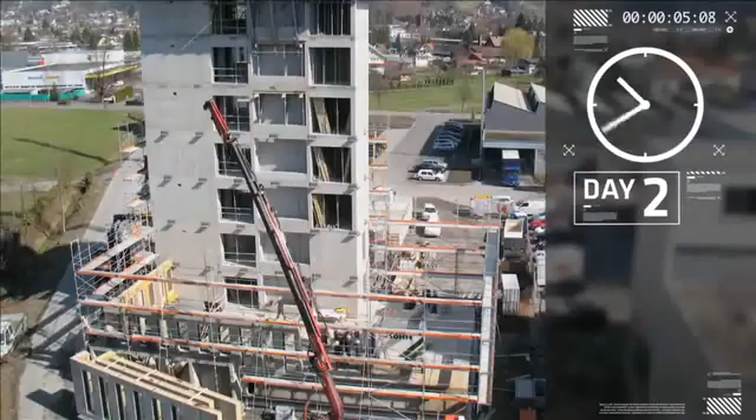So this is a time-lapse video of how LCT-1 was erected. It's an 8-story office building. While the foundation and the central core were being built on-site, the walls and the floor plan panels were produced off-site. Once completed, the prefabricated elements were delivered to site and the building enclosure was assembled.

First, the facade elements for each floor were installed. Once all the walls were up, the floor slabs then are placed on top of them, floor by floor. It took 8 days to install 8 floors, and all the work was done by 5 carpenters.

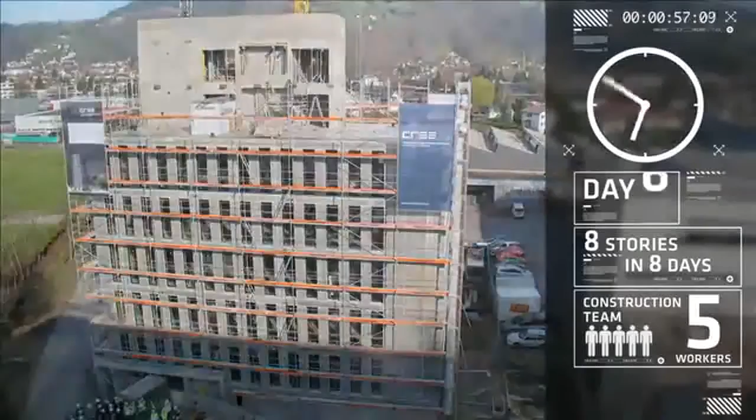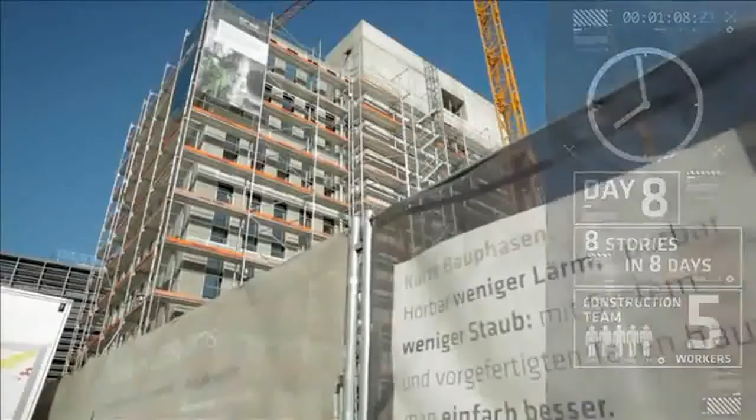The facade elements are delivered as completed wall panels, which include the framing members, insulation, windows, sheathing, vapor barrier. And the floor elements are hybrid slab. These are wood concrete slabs, and they were also prefabricated into one element in the shop. Here's a close-up of one of the floor elements and then the wall elements.

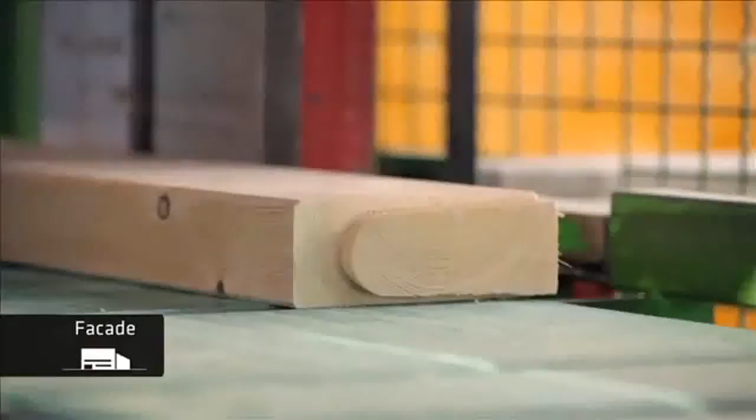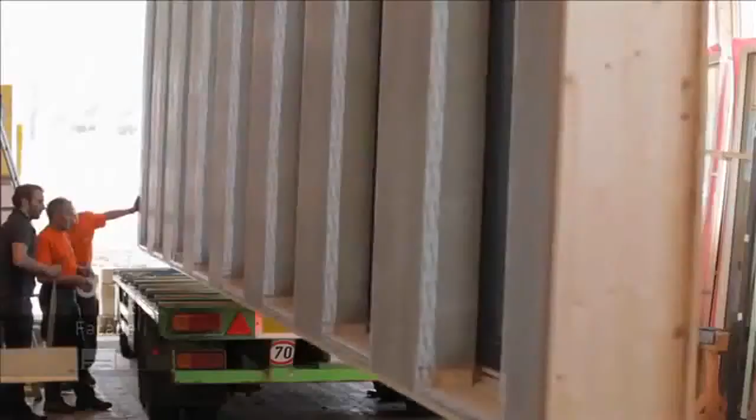Now you're going to see the carpentry shop where the facade elements were produced. They're produced flat on tables. Once the frame is completed, the panels are stood up to install the windows. All the joints are taped airtight to optimize the energy efficiency. The panels are then stored and when ready, loaded onto trucks and delivered to the site.

Here are the floor slabs. They're made up of 4 wood beams, 2 at the end and 2 in the middle, with concrete poured around them to create a diaphragm. You can see there's 4 holes in each corner of the slab, and these are needed for the assembly, which I'll describe later.

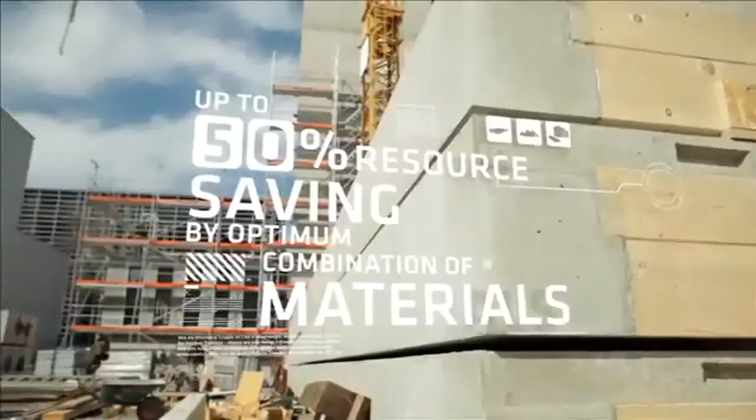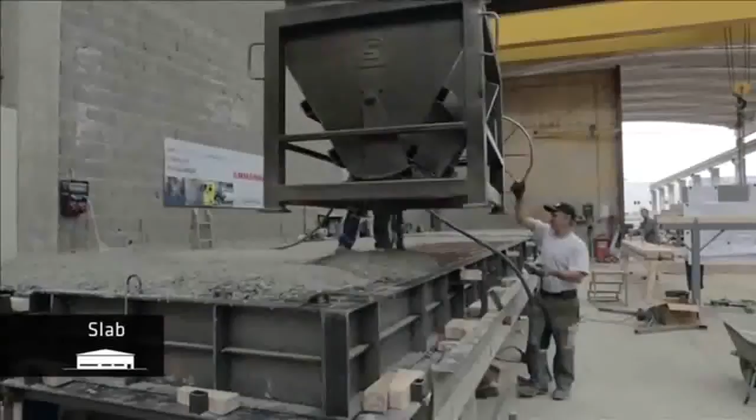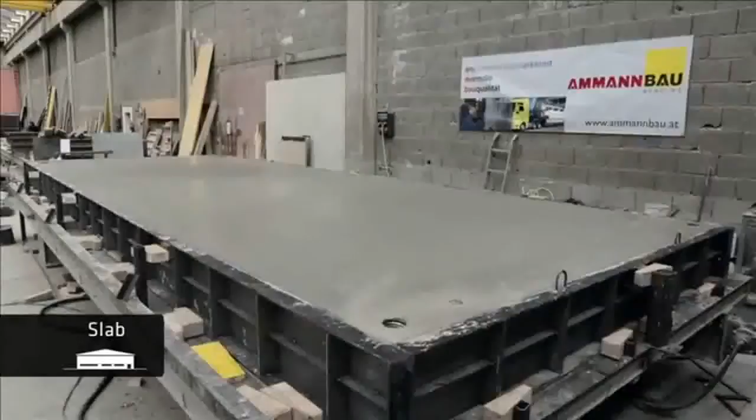Next, we're going to look at the precast concrete facility where the slabs were produced. The wood beams were ordered from a lumber company who cut everything exactly to precision using CNC machinery. The beams were then delivered to the precast facility where they're laid in metal formwork. The reinforcement is then installed and concrete poured. The next day, the form can be opened up and the next slab produced.

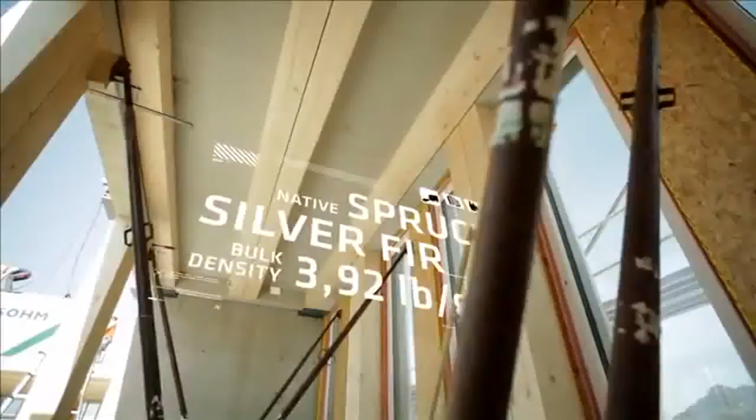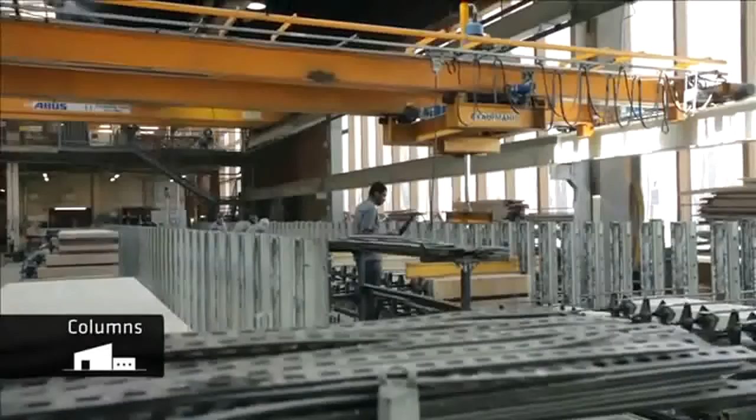All the wood used is engineered lumber. It's all finger jointed and laminated. This wood is stable, it won't shrink and it won't twist, and can be cut precisely. Engineered lumber uses smaller wood sections to create larger elements. This is a method to manage the forest, allowing healthy trees to grow while removing older or damaged trees that no longer absorb and sequester carbon.

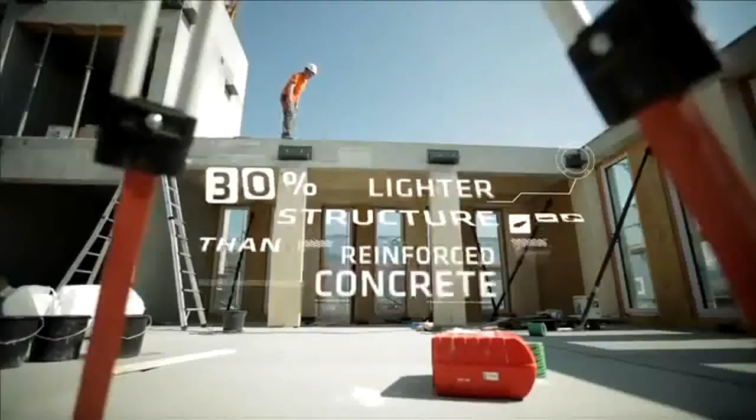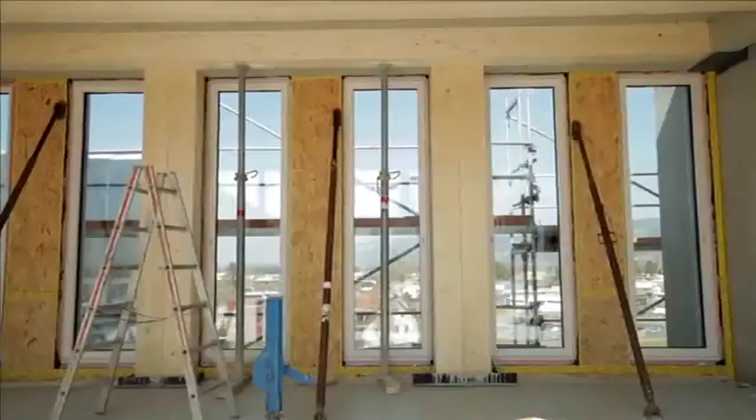The system of design and construction allows for lighter buildings using wood as a renewable resource. They're made into panels that can be assembled quickly without disturbing the neighborhood. Each story is assembled watertight and airtight, while emphasizing the beauty and warmth of the wood, which is a natural material. This is much different type of office building than we're used to.

For LCT-1, a recycled aluminum rain screen was installed on site. LCT-1 was designed and built to a very stringent energy standard called the Passive House Standard. Using the LCT system, each building has an individual design and can look completely different, but all are resource and energy efficient.

To explain all of that, I think the best way is to first introduce myself and how I was introduced to this whole system. I'm an architect in Berkeley, California. I went to UC Berkeley and was licensed here. My wife is Austrian, and in the early 90s we decided to move to Austria so she could be with her family.

And our daughter could get to know her mother's home. I ended up becoming a developer rather than an architect, and I found this old barn that we turned into 15 condominiums. This was my introduction to timber construction and energy efficient design, which is very standard in Austria. You can see the building on the bottom left.

I did the design by hand. The carpentry company took my drawings, put them into a computer, and delivered the parts exactly as specified. All the wood was pre-cut and pre-drilled, and many panels were already assembled together. At the time in the 90s, this was a standard called open wall standard, where the wall itself was not insulated and the windows were not in — a low energy standard. You can see the completed building on the bottom right-hand corner.

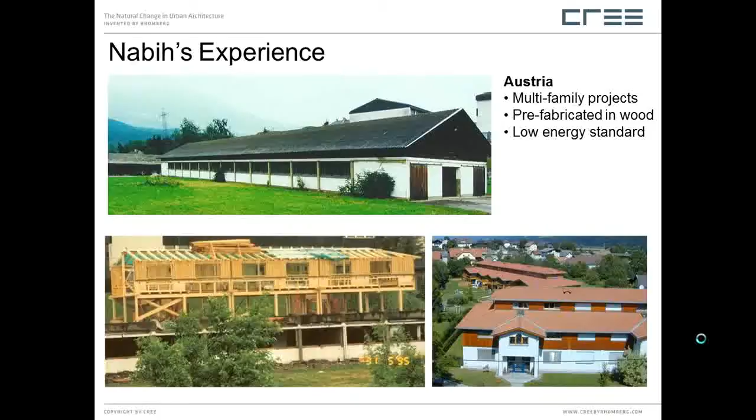We kept improving the system with that same company, and at some point in the late 90s we began to sell houses to Ireland, where their system had advanced further. The same carpentry company was now making closed wall panels with the walls already insulated and windows installed. They made the houses in Austria, put them on trucks, flew the carpenters to Ireland, and assembled the houses there in a week at a time.

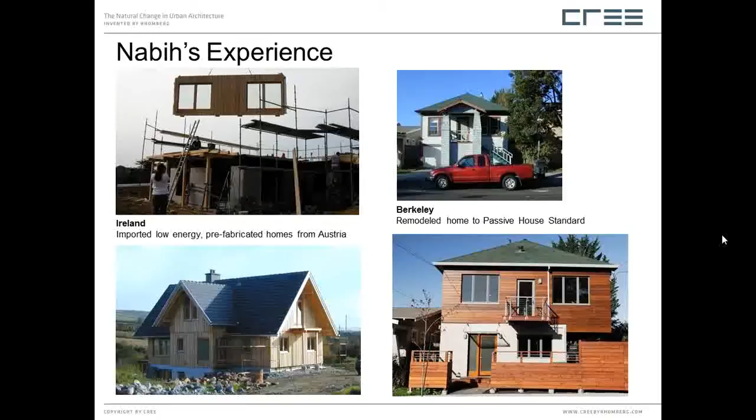Through this project, I began to work with the Austrian Trade Commission to help Austrian companies come to the U.S. and promote their energy efficient systems, products, and construction methods. That's how I began to work with Cree and help them promote the LCT system.

So the Life Cycle Tower system was developed by Rhomberg Bau, a large general contracting firm on the west side of Austria. It's a fourth generation company with a lot of know-how and many people with extensive construction experience. The current CEO, Hubert Rhomberg, wanted to do a better job of construction and make all his buildings much more sustainable.

He knew we were using too many resources from the earth, and he looked at ways to make buildings not only more resource efficient but also more energy efficient. They looked at trends in how we live and how our cities and countries are growing, and there's definitely a trend toward urban areas — denser cities, closer to rapid transit systems, so people don't have to drive everywhere and have everything accessible.

So one of the ideas was how to come up with a new system for urban areas made more out of wood — a natural, renewable resource — rather than always relying on concrete and steel and products coming from fossil fuels.

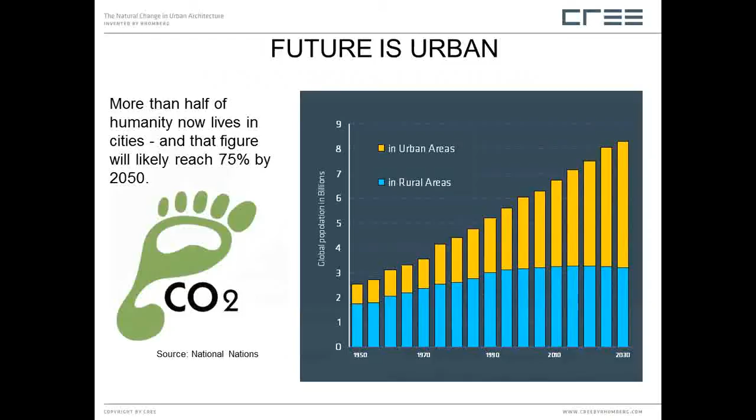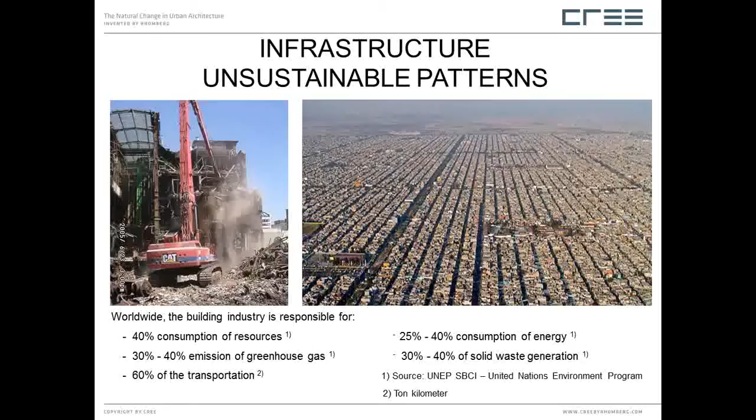Also, when you look at the infrastructure and the buildings we have and their performance, it's well known that the building industry is responsible for a lot of resource consumption, emissions, greenhouse gas emissions, and energy use. So overall, the building industry isn't performing very well right now, and it's responsible for a lot of our climate issues. Also, the process of building is very chaotic.

It's still very manual — it hasn't improved. The process of making buildings is nothing like how we make cars or computers. We still go over schedule, it's still expensive, and on top of that, the buildings themselves are not performing very well.

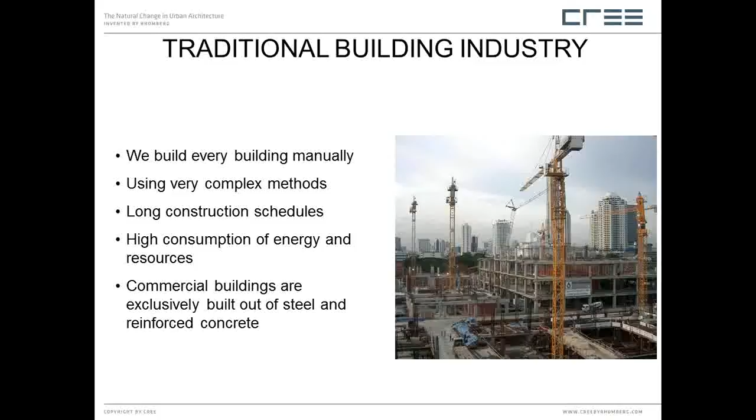So Rhomberg Bau decided they're going to start a research project to come up with a solution to resolve a lot of these issues. And this is how the Life Cycle Tower process and concept was invented.

Rhomberg Bau put a team together to come up with a solution, and part of the team was Arup, a worldwide engineering firm with offices in Berlin, specialists in timber. They've also worked with Hermann Kaufmann, an architect from the same province of Austria as Rhomberg Bau, who is a specialist in timber construction. He grew up in the Alps, and everybody in his family is involved with timber and wood, so he's got a lot of know-how.

Another member of the team was Wiehag, a lumber manufacturer. Together they put their heads together and came up with a system where you can go up to 30 stories, up to 100 meters, for a tall high-rise wood building. It's all prefabricated using a modern industrial process, and it can meet the passive house standard, and if the client wants, it can even be a plus energy building that produces more energy than it needs.

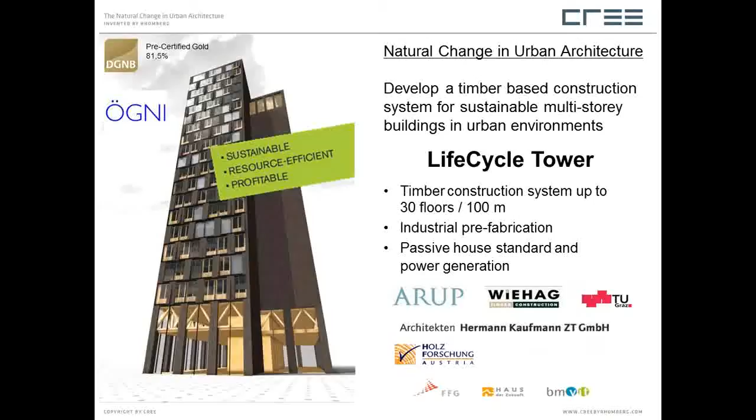To do that, what was developed for the Life Cycle Tower was a building system. We like to talk about it like my computer—it says Intel Inside. This is the little chip that operates the computer, and every manufacturer that has a computer uses that chip, then designs the computer the way they want: different color, size, speed, performance. The idea was, how can we do that with a building, for the building industry, with a new wood system?

The main part of our building system is that with tall buildings, you always have a core in the middle. This is the stiffening part of the building—like the flagpole versus the flag itself. It's very stiff and takes all the forces. In that core you usually have the elevators, the stairs, the shafts, the bathrooms.

Then on the exterior of the building we have glulam posts—you can see them here on the outside. They're carrying all the gravity loads, all the load going down to the ground.

And then we developed a hybrid slab system that you saw on the video—a slab of wood and concrete. The slab spans from the exterior walls, sitting on two posts, and spans to the center of the building to the core. This is where all the forces are transferred to the slab, and from the slab to the core and down to the ground. So that's kind of the core inside of our system.

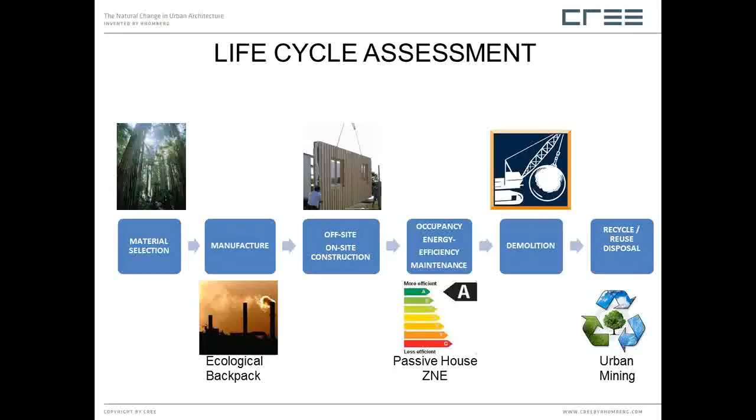And then at the end of the life of every building, what do you do with it? Do you just demolish it, dig a hole in the ground, throw everything into the hole, and start all over again at point one with new materials? Or can you design buildings in a way that at the end of their life you can actually recycle the materials and reuse them?

So that was the idea behind everything we were thinking. And some of these things are sometimes not so simple to look at or understand.

One of the things we talk about in Austria is the ecological backpack - looking at some of the products we have, and when you see how much they really weigh, like a pair of jeans or a cell phone, and then add the weight of all the materials needed to actually make that product, it turns out the weight is much more, with a much higher ecological backpack than we'd think. A cell phone weighs 0.3 kilograms, but in reality it's carrying 500 kilos.

The other thing we always talk about is urban mining. We don't always have to mine the earth - we have already mined it once. A lot of the products that came out of it are already in our buildings, so why can't we just find a way to reuse a lot of these buildings for other things?

And that's basically the beauty of wood, and why wood is such a great product. When you look at the forestry carbon cycle of wood, it's very sustainable - it's carbon neutral. On one side you have things that emit carbon into the air, like factories and cars, but also trees. Young trees absorb carbon, give us oxygen, and grow fast - they're really working for us.

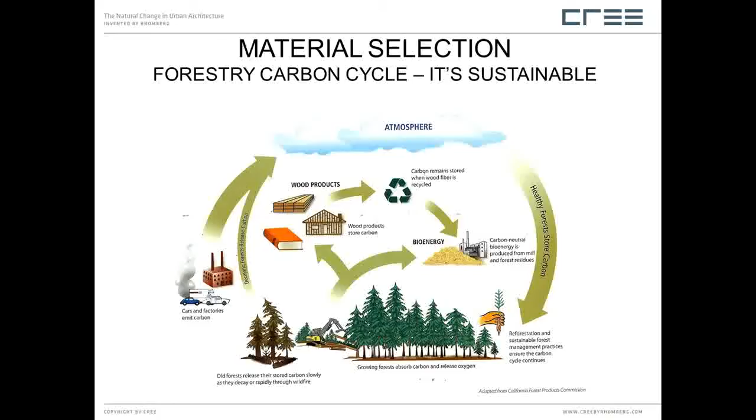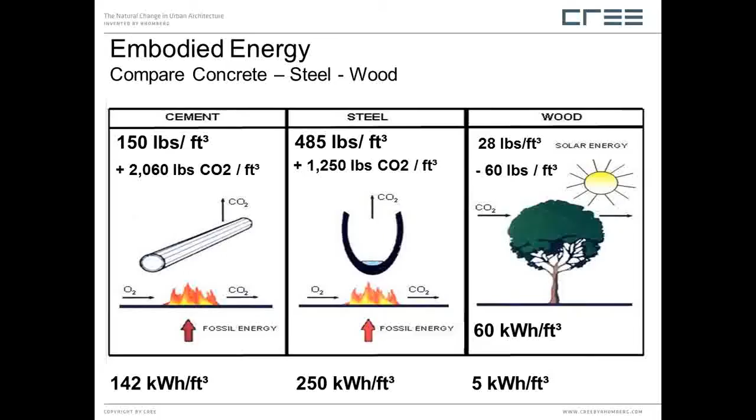Steel weighs more, 485 pounds per cubic foot. It needs more energy, 250 kilowatt hours per cubic foot to produce, but it's a little better with CO2 emissions, about 1,250 pounds. Wood is much lighter, 28 pounds per cubic foot, and only needs 5 kilowatt hours per cubic foot to produce. At the end of its life, you can heat with it and create energy, which makes wood pretty much carbon neutral, and it's all from solar energy from the sun.

Here are some examples of modern wood products coming on the market. Some you're already familiar with, like glue laminated timber, made out of smaller pieces of wood to create larger pieces, and finger jointing of wood members to make them longer.

This new product coming on the market is called cross-laminated timber. These are large slabs of solid mass timber that come in 3, 5, 7, or 9 layers, in panels of about 30 to 40 feet long, 8 to 10 feet high, and anywhere from 4 to 11 or 12 inches thick.

Different manufacturers have different systems for making them. This material is becoming popular because a lot of our forests, especially on the west side of the U.S., have mountain pine beetle infestation. Research shows this is a good solution to take this wood out of the forest before it all burns, and turn it into a building product.

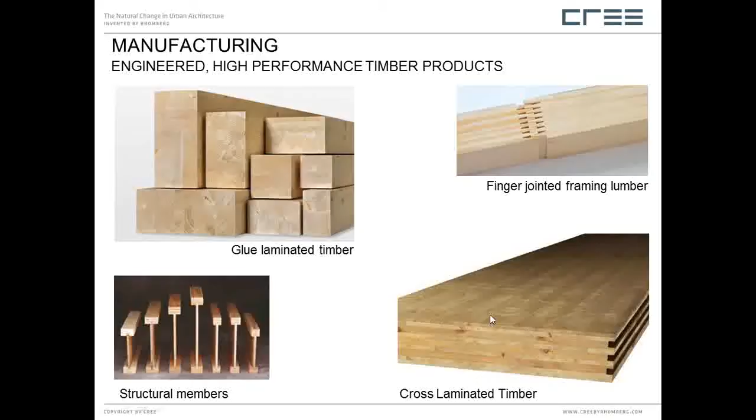With these modern wood materials, we have a modern way of working with them, starting with a CAD program that the architect or engineer draws in. That data can then be sent to a machine, which cuts the wood to very high precision, exactly like the drawing shows.

Then this process of industrial manufacturing that we already use to make cars, computers, furniture, and refrigerators - we can use the same type of system, making panels together on tables. Some of the bigger companies have ways to flip the walls over so you can work on the back side, then stand them up and add the windows, the siding, and so on.

Different companies in Central Europe have different ways of doing it, but a lot of it involves much more prefabrication than we do here in North America, and they're also able to make closed, finished components. This is an example of bringing an entire wall and placing it, including insulation, windows, floor elements, roof elements, and it's even easier to have the mechanical system prefabricated off-site and brought on-site.

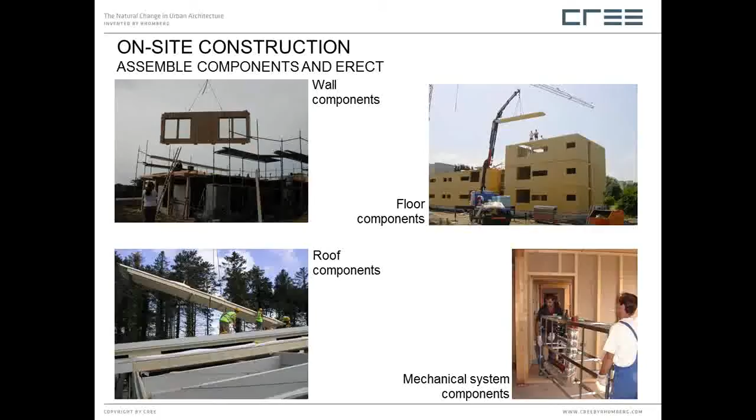After Cree, this was the motivation and the idea, based on what was going on in their country in terms of the wood industry, carpentry, advanced carpentry products, and systems of work. They decided they wanted to come up with a product they could put on the market.

When you analyze how we build and deliver buildings, we have the original system - the traditional system they call design, bid, build. You have an owner, then an architect, then the builders and estimators, up and down the chain. That system has proven it doesn't really work. As I said at the beginning, the buildings are not performing - they use a lot of energy and resources, have a lot of defects, price overruns, and scheduling overruns. So we're trying to look for a better system.

This better system now is called the integrated design process, where if a client is informed and wants a better building, he puts the whole design team together at the beginning. He understands he has to pay a little more money up front, but at the end he's going to save a lot of money.

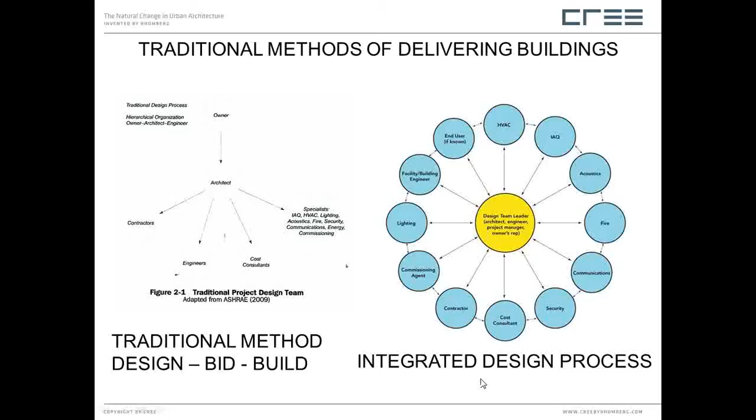That whole design team kind of works together to design the building. But when we looked at that building, it's also a prototype. All of our buildings are one of a kind. So Cree wanted to come up with a system where we can integrate a lot of this design process in-house, something people may or may not see in a building, but we don't have to create it every single time, that we have a system that can be used but make every building different, different heights, different lengths, different appearances, but they know that they will perform because the backbone of the system is already proven.

So in our case, for these tall wood buildings like the life cycle tower, we have a core. This is the stiffening part of the building. That core, from the research that we've done, we feel confident from an engineering, seismic, and fire point of view that it can be made out of wood. It might be a little bit too early to have building departments accept that, so it could also be made out of concrete or steel.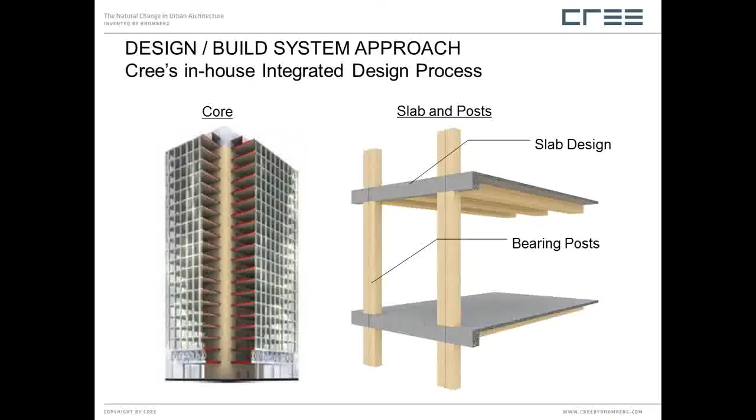On the outside of the building, then we have the glulam posts. These are the bearing posts. They're bearing all the loads up and down. And then attached to that are our slab system, our hybrid slab system. This is where we've spent most of our time and money to research and come up with a solution for these slabs.

Additionally, what we can add to the building is our facades. The facade in our life cycle tower office building is what we call a curtain wall. It's not load bearing, it's not carrying any of the loads, it's just attached to the post, so it's just hanging on the outside, kind of a jacket on the whole building. On that facade, you can add different elements, from solar elements, shading elements, the windows, the insulation, green walls, anything that the client and his design team would like to have.

And for the interior of the building, also with our technical team, we can help with the design team and optimize all the systems so that they all work together, from the facade itself to the heating and cooling and ventilation and lighting and so on.

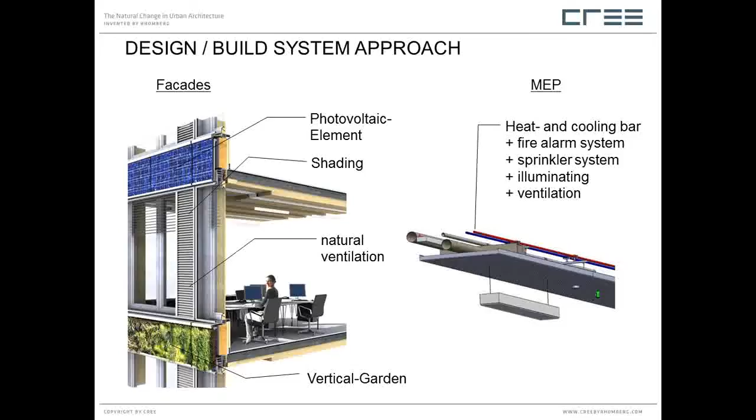So to start, we built a small little building as a prototype to see what it was like, and we assembled it and also disassembled it to see how it could work.

While at the same time, we ran a series of fire tests, because that's one of the most important things. When you use wood, there's still some fear that wood burns. But what we found is wood does burn, but it burns very predictably. We already know this, it's actually in the codes, and it basically says for every 1 hour of fire protection you need on a piece of wood, you need to add 1.5 inches of wood, because that's how long it takes for 1 hour of wood to burn when you have heavy timber, big pieces of wood.

We make the wood bigger by adding 1.5 inches of wood on every surface that would be exposed to the fire. And you can see, after a series of tests to optimize the system and have the wood and the concrete work together, we were able to pass a 2-hour fire test.

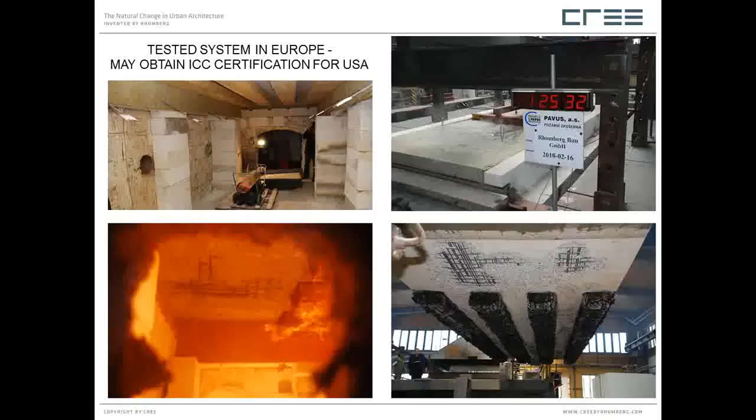The idea of a hybrid system of wood and concrete is that every material has its own properties. They don't all perform the same. They're good at some things and bad at others. So to be able to make these slabs as light as possible, use the least amount of material possible, it was best to combine the best properties of both the concrete and the wood to make these floor systems that can span 30 feet and carry all the loads that need to carry, and at the same time withstand the fire requirements that are required. That's why we came up with a hybrid system.

After all of that, we decided that we needed to put up a building to show what we've done, and this is the story of LCT-1, this office building we put up in Austria. It was a project developed by Rhomberg Bau itself on one of their properties. The architect on this project was Hermann Kaufmann, who helped us originally with the research of the project.

And then we added the offices around it, only on one quadrant, just to save some money, but a developer would have actually been able to go four times around this core. That's how stiff it is. But this, we just wanted to show what we can do.

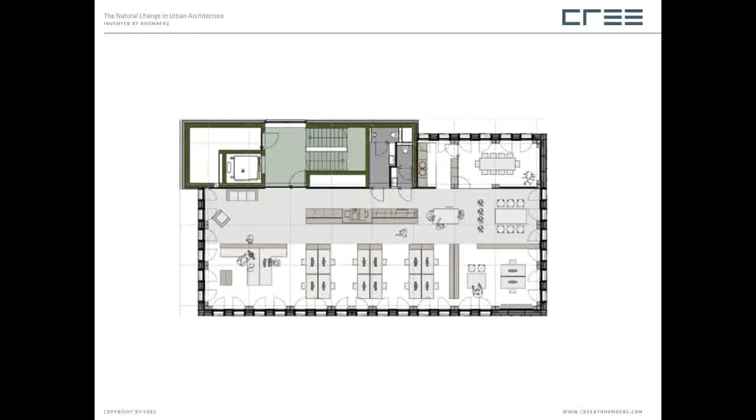So we have the offices here attached to the core, and here is an example of where, in terms of design, we can extend away from the core and still add to the building, not always having to support things only on the core. Those are part of the design of the system. You can see one area of the entry is two stories, just the entrance, but altogether it's eight stories.

So this is a little more detail on how we actually built the building together. Here is the central core of the building. The building department required us to build that out of concrete, so we did. The foundation and concrete were built on site, and off site we were actually making the wall facade elements and the floor elements. This building was built in Austria according to the Austrian seismic requirements.

And so we've actually adapted this to the US, which I will show you closer to the end of the presentation.

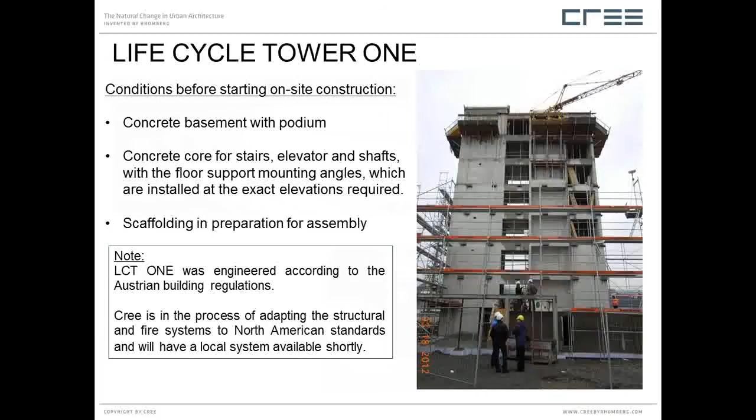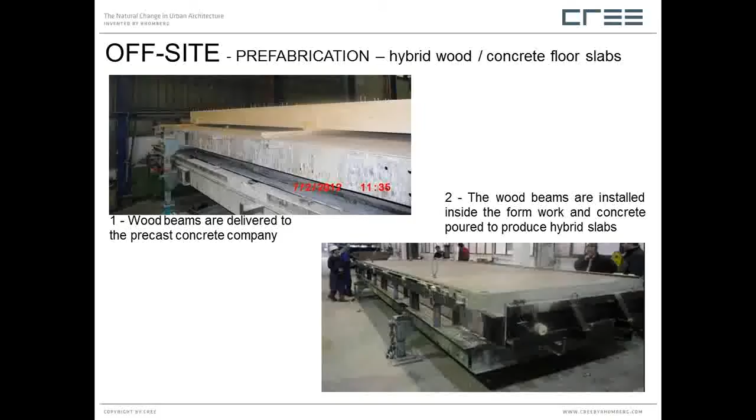Here's the slabs being made off-site. So we bring the wood to this precast concrete company. We have the metal formwork that opens and closes. We put the wood in, we put the rebar, we pour the concrete, and then the next day we can open the slabs and store them.

At the same time, we were making the carpentry, the wall systems being made in a carpentry shop. Here you can see they're all heavy-duty glulam posts. And the way the system works, at the top of every post there's a metal tube, and at the bottom of every post there's a plate.

The ground floor posts have just a flat plate with holes that you can bolt onto the foundation. But once you get up higher, these plates have pins in them. Basically these tubes on the top have a little hole in them, and this pin goes into the hole. That's how we're able to assemble things really fast.

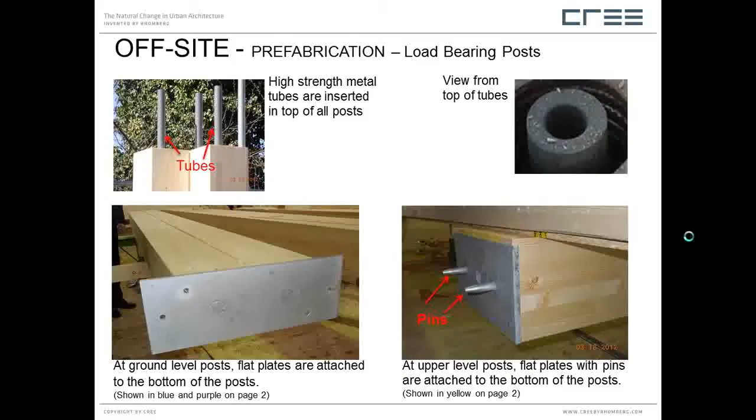This is a thicker wall, thicker than we would build in California, but in Austria it's a cold climate, so to meet the high energy demands or to reduce consumption, you need more insulation.

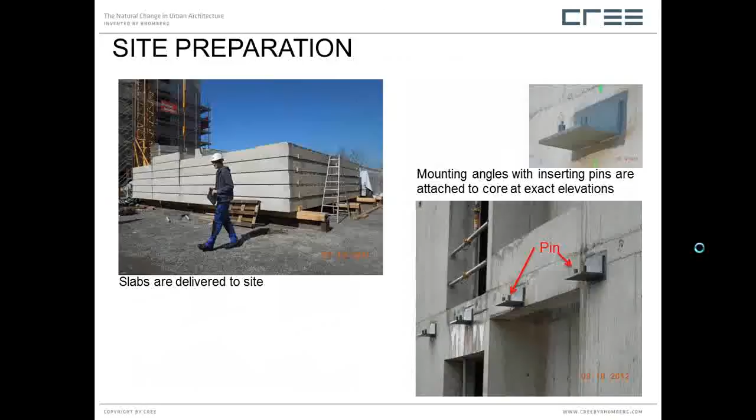Once we start on the site, all the slabs are there, the core is ready, and there are metal angles with pins poured into the concrete to take the slabs. Then we start construction. The first step is to bolt all the ground floor posts into the concrete at the foundation, and then we start bringing the walls. This is floor number 1.

You can see the wall elements come in, windows are on, everything is on. Here are the posts with the tubes on top of them.

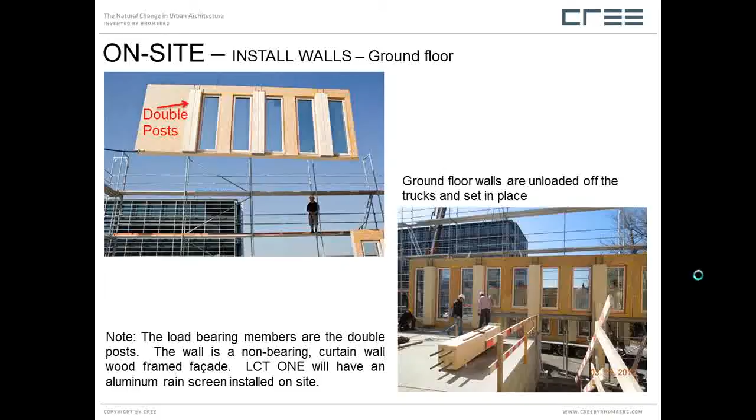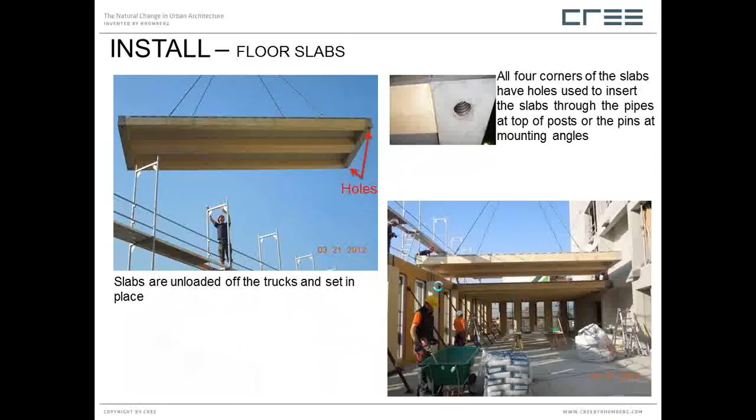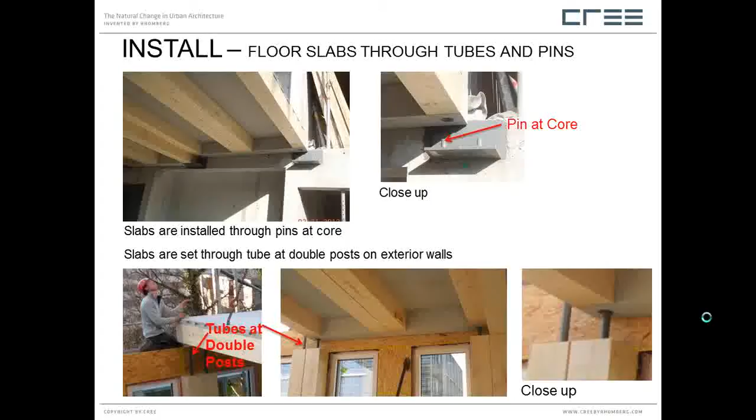After all the walls for floor 1 are put in, we start bringing in the slabs for the floor. Each slab has a hole in the corner, already taken care of when we made the slabs in the formwork. We can just drop a slab into place, and at the wall we have the angles there with the pins. It sits right through the hole, and this doesn't need to go floor to floor, it's just attached to the wall. But on the exterior, they need to be connected together, so we have a much longer tube at the exterior wall, and the slab just slides into it and finds its place really quickly.

Once all the floors are put together on one level, if you go up on top, you'll see these tubes sticking up above the slab, about half an inch or so. Then we start bringing in the walls of the next floor, and the walls have pins at the bottom—that pin goes into that hole there. That's why everything kind of fits together really well.

In terms of connection, we have a metal plate sitting on a metal tube—that's where everything is bearing metal to metal. But we have wood from floor to floor, kind of separated also for fire reasons, with concrete in the middle, but everything is actually bearing on metal.

This is the floor below, you can see the different slabs. The next floor is going up. Everything as it goes up has to be very plumb, very level, so that everything fits.

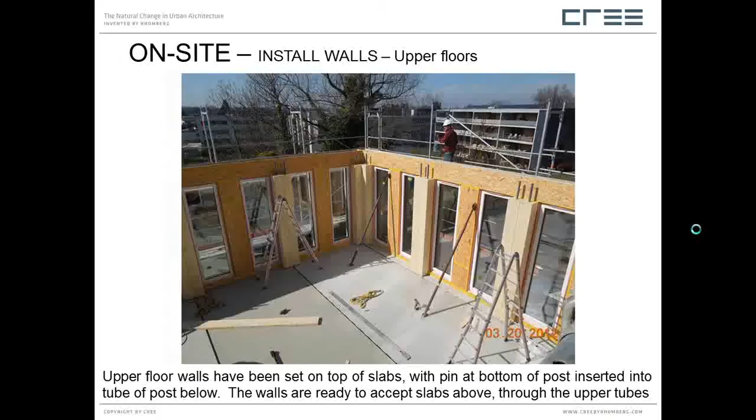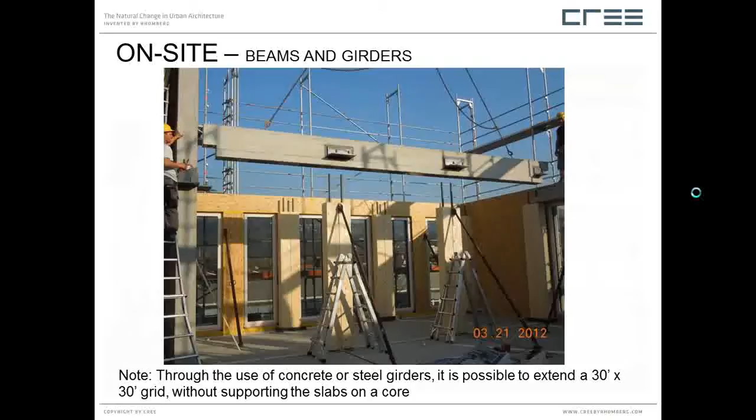Here's an example of where we were able to extend the grid. This is the corner of the core, and we have these concrete beams also sitting on wood posts, still the same system with the tubes that it slides into, and then we can bring in the rest of the slabs. As soon as we put up a floor, the building is watertight and airtight.

There's a lot of exposed timber in it. It smells really nice, it feels very comfortable, it's warm. This is an example of the office building now, how we finish the ceilings and the floors. One of the top floors of this building is now the Cree office.

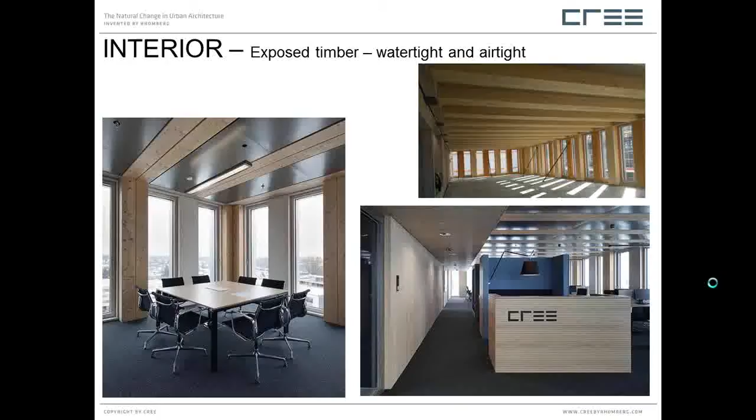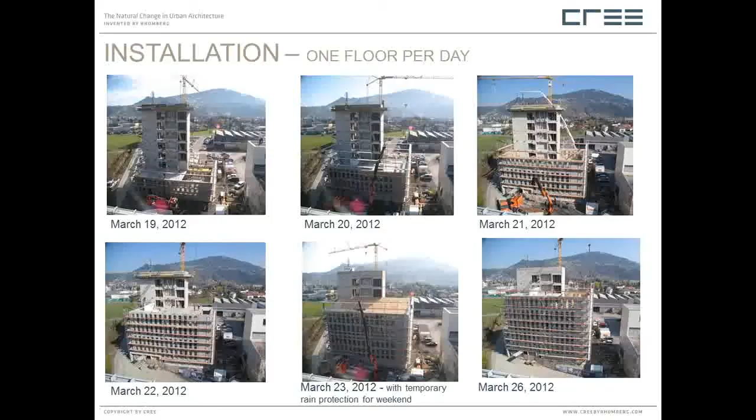For this building, the building department didn't allow us to use a wood facade, so we ended up using a recycled aluminum facade that we installed on site. We could have put it on in the factory, but the aluminum was very thin and would have been damaged, so we decided to make that on site.

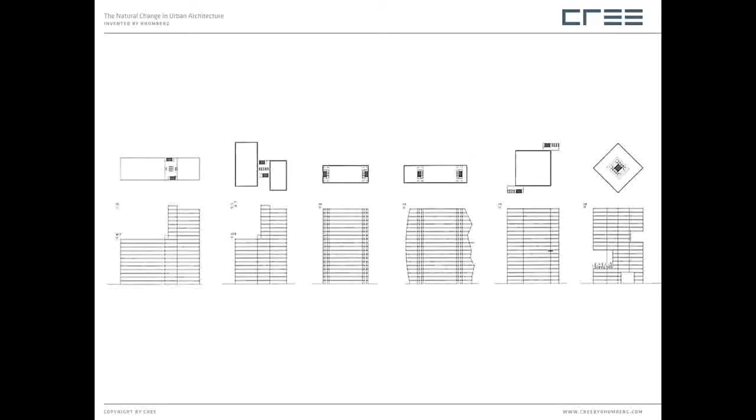In terms of design, our system, the Cree inside, is made out of a post and beam system with a core and slabs. There are several ways of building a building like this, and it's up to the design team and owner to come up with their own design, but the parts of the building are always the same. Whether there's one core or two, it doesn't really matter—there's flexibility in terms of design. Even though it's a system, it doesn't mean all the buildings look the same.

All the buildings built to the system up until now look completely different. You can also have interior light wells in the middle of the building. It's really up to the design team to use the elements we came up with and design the building.

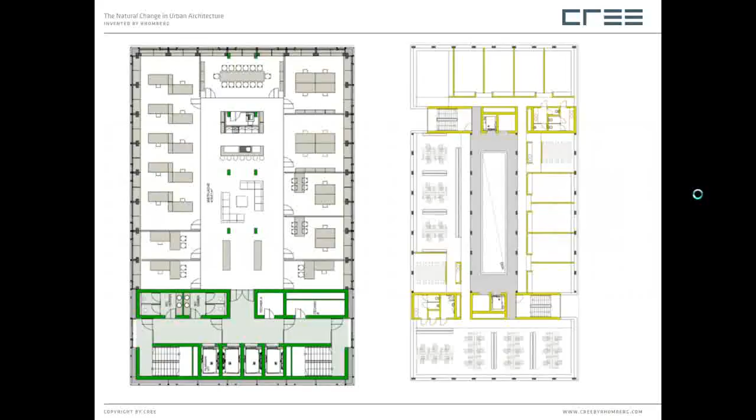Another advantage is the life cycle of the building. Because we have a 30-foot span from the core to the outside walls, the interior non-bearing partitions can be added and removed easily. The core stays the same, but we can change the building from a hotel to an office. The building begins with one use in mind, but 10, 15 years down the road, the neighborhood may change and that use isn't the best for the building anymore. You can easily access all the systems of the building, take them out, replace them, and change the use of the building without having to tear it down.

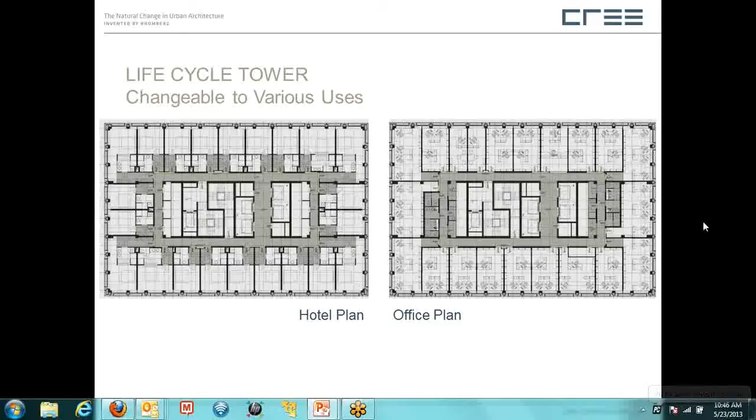While we were building LCT-1, Hermann Kaufmann, the architect who designed the building for us, who has his own architecture firm and takes part in design competitions, entered an international design competition for an office building. He won, and only after winning did he tell the client that the building was designed using Cree's life cycle tower system.

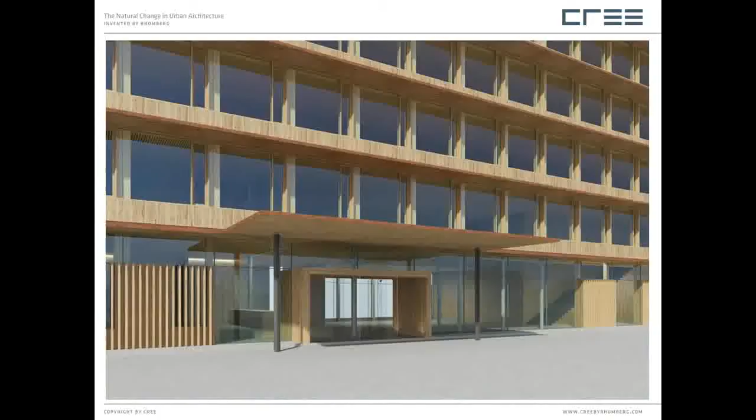This was the second project we built. It's only 5 stories, but it's a very long building. Altogether in square feet, it's one of the tallest and largest wood buildings in Europe. Its design is a little different now — it has 2 cores instead of 1, with 2 ends of the building cantilevered away from the core.

These parts of the building needed to be tied together to bring the forces back to the core. This is when we began to come up with solutions similar to the seismic solutions needed here in California and on the West Coast. In the middle of the building, the design uses steel posts and beams, and the slabs are supported, with 2 different size slabs. This part is a little off-center, so we have the walls on the outside, using exactly the same idea.

The posts and the wood-concrete slabs are bare in the middle and on the outside walls. The MEP system — mechanical and everything — comes from the basement up into the core and then through drop ceilings to all the rooms.

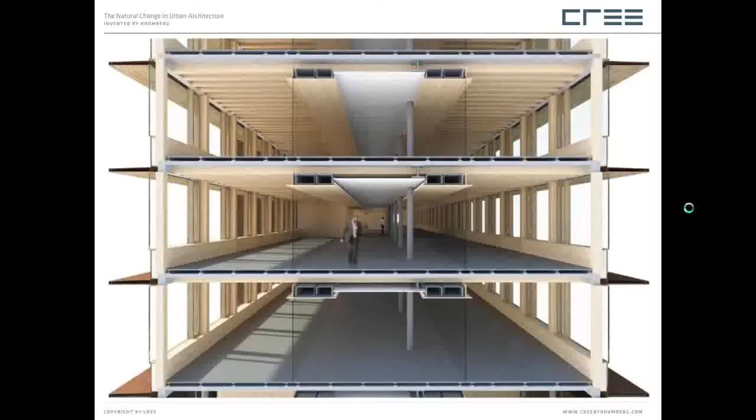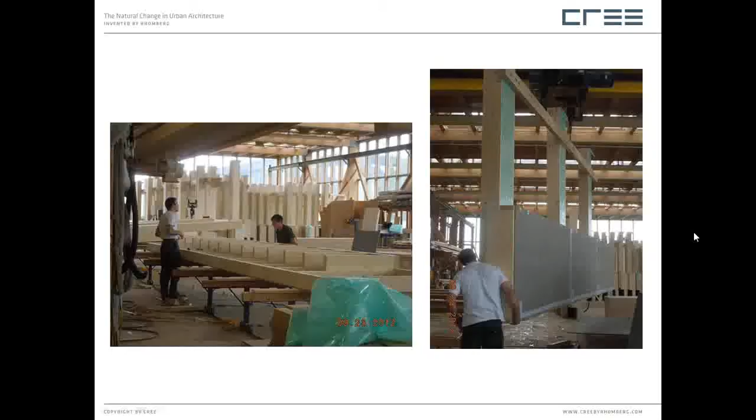Here's an example of the carpentry. The same carpentry company built all the facade elements here, but in this case they decided not to put the windows into the walls, because the windows were much larger for this project. So they built the walls in two sections: here's the load-bearing part with the insulation and the posts, visible on the left, and then they brought in the slabs, bearing on the steel in the middle.

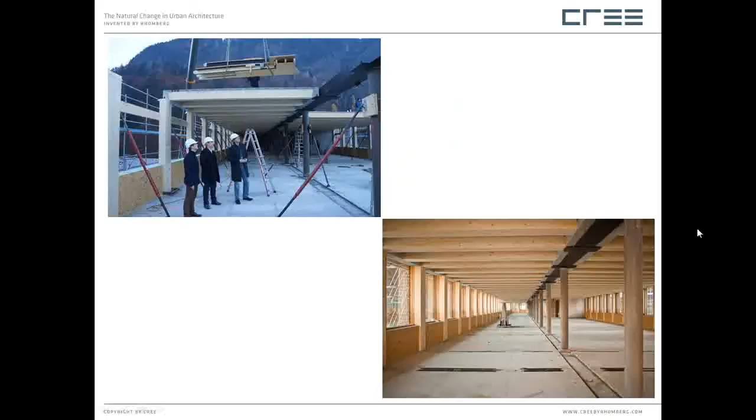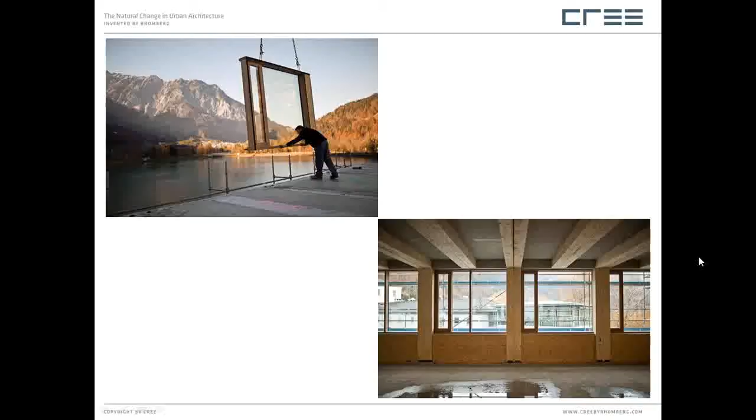Here you can see what it looks like, similar to LCT-1. They then brought in the second part of the wall, where the windows are set in a frame, and those were dropped into place as soon as the floor was finished. So it's the same system, but a completely different looking building. This building is over 120,000 square feet of office space, and after the core and foundation were finished, we put up the building enclosure in 6 weeks.

Here's some images. Pretty soon we're going to have finished images.

Now that we're here in North America, with an office in San Francisco in the Bay Area, we decided to adapt the system to our standards here, working with Arup, the same international engineering firm that helped us originally with the research. In terms of fire, we're defining this building as heavy timber — that's where it falls under the code, and the structural members are oversized so that the additional wood provides fire protection for the structural parts.

In terms of seismic design, we're trying to make it fit within a standard system so we don't need special permissions to have it accepted. We want something innovative but that fits within the code so that we can build here.

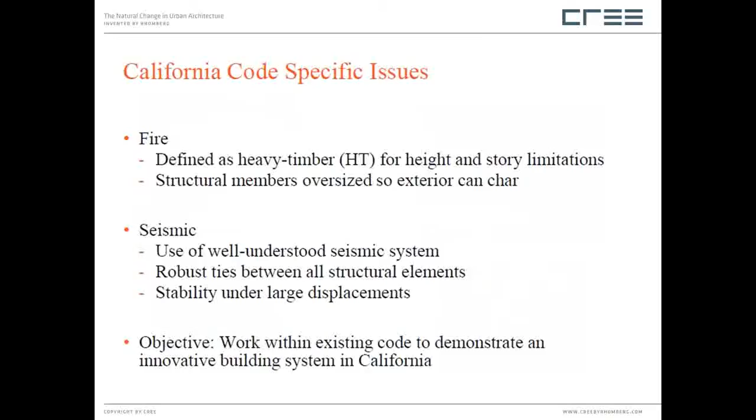So we came up with a generic solution for building in our seismic area. Taking all the code considerations, we ended up with a building with two cores, partly for the exiting and fire requirements, and also because two cores lower the forces that come to each core. In the middle, we have a section like a corridor sitting on wood posts, but this section is only concrete, where we can run all the mechanical and electrical systems.

From the inside to the outside, it's again the same slab system we used in Austria, with the wood-concrete hybrid slabs.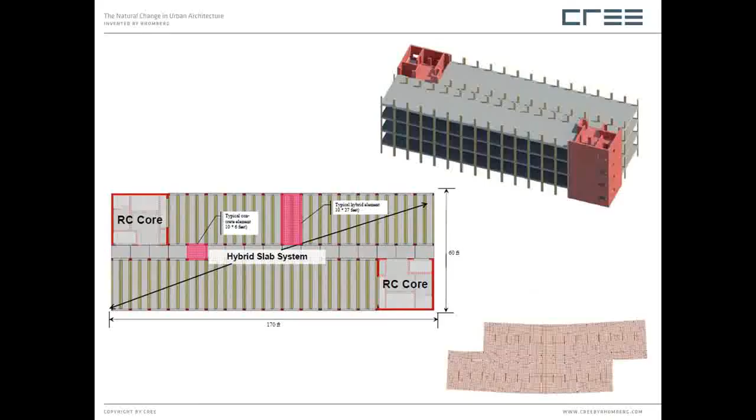Then Eric ran some modeling and simulation of the forces on the building, and they saw how the building can move as much as needed during an earthquake, but still not come apart, and come back into its own shape.

So what we had to do is find ways to connect things together differently than we did in Austria. One idea was how to have the slabs bolted together so they stick together more, and then at the end we just fill the little hole with some non-shrink grout.

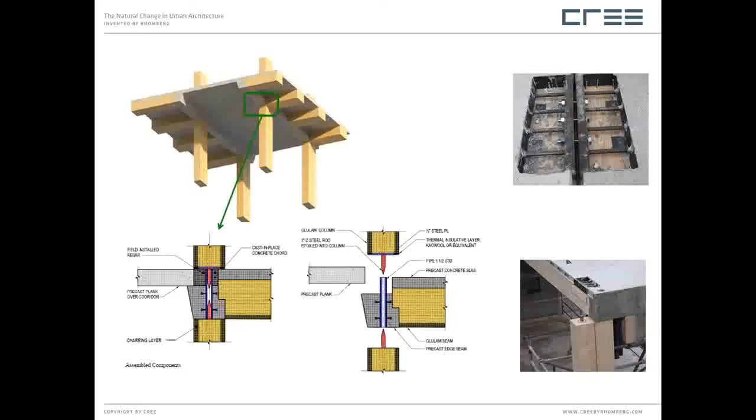We came up with a system where the posts, beams, and tubes fit together, allowing movement and transfer of forces from the post to the slab diaphragm to the core, without things coming apart. They could move, and that's the advantage of wood—it's a little flexible, so it won't break and can still transfer the forces.

This is another example with another architect we worked with, for a project in Oakland. They're trying to rehabilitate a whole neighborhood, and we suggested starting with something in wood to show new technology and sustainable ways of building.

Without taking too much time, the architect was able to take one of the buildings on the drawings and quickly adapt it to fit the life cycle tower system, again with the cores, slab system, and posts. Then we came up with a solution to tie these slabs together across the building and add reinforcement, creating a kind of belt around the building to keep everything together for our seismic area.

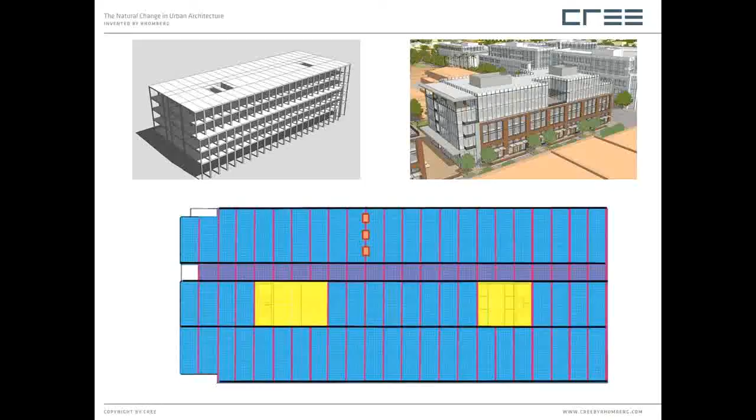Because we are the general contractor and build the parts of our system ourselves, we also have one person on our team who is a supply chain manager. He comes out of the auto industry, knows how that industry makes things, and we're trying to use the same kind of technology to make our building.

Here's an example of how we make the slabs. We order the wood from the lumber manufacturer, and everything is cut exactly as the drawing specifies because they use CNC machinery. The wood company itself attaches whatever metal fasteners go into the wood, like screws or anchor bolts.

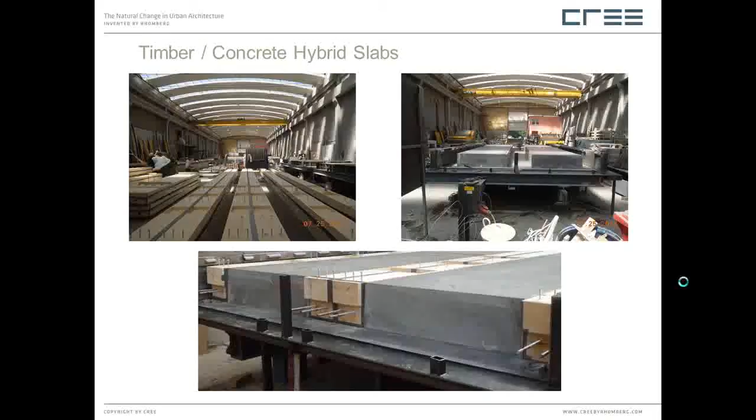These get dropped into the metal frame, as you see here, and then we order the reinforcement, which gets placed inside the formwork before the concrete is poured. The advantage is we can start earlier, then store the concrete slabs and let the concrete cure, so we don't have to wait for that on site, and we don't introduce too much moisture into the building, which is also not a good strategy.

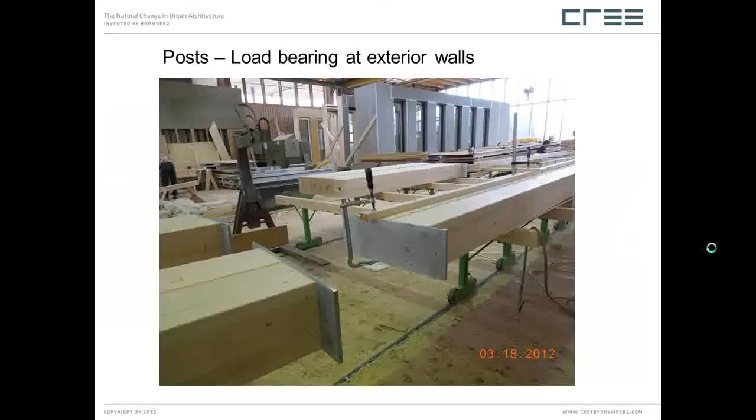Here, as you can see, the carpentry company is making the walls, which I showed a little bit of earlier. Here are some of the walls. They make them on tables, stand them up, and load them.

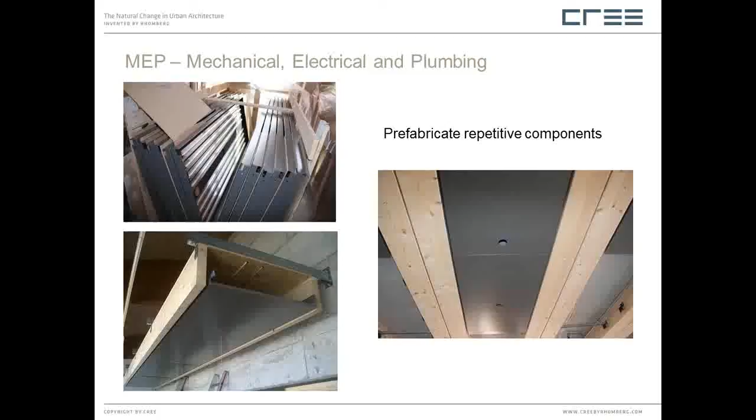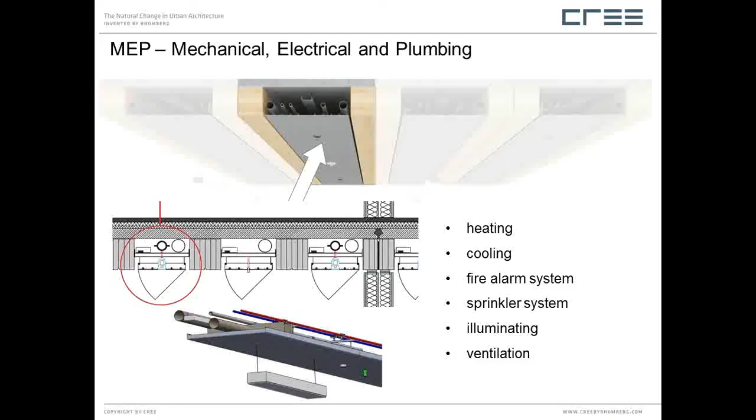Here's some of the work we've done for the mechanical, electrical, and plumbing. Eventually these buildings will be like plug-and-play buildings where all the systems can be manufactured and brought into the building and placed, but remain accessible the way we've designed it. You can drop down and fill the space between the beams with all these different systems, and the doors are hinged so you can actually get right up into it. 15, 20, 30 years down the road, if there's newer, better systems, it's easy to replace them without tearing the whole building down.

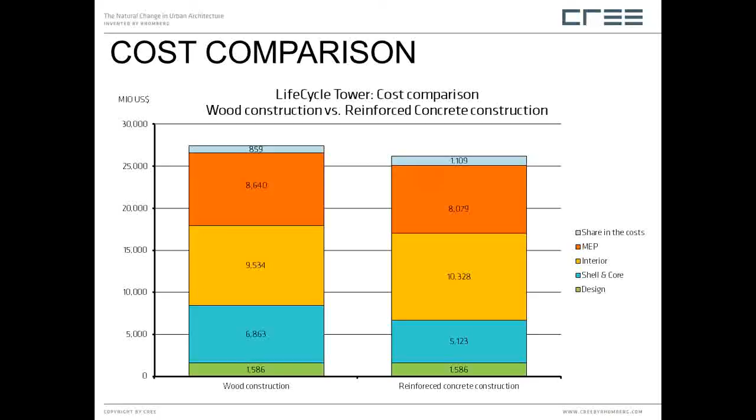In terms of performance, when we compared a wood building like this with a reinforced concrete building, this is some of the work we did during the research phases. We found that in terms of cost there really was hardly any difference, especially since this is very early in development stages, so not many people know how to build like this yet. But when you compare the CO2 emissions of a concrete building versus a wood building, the wood building is over 90% better, because it's a renewable resource and doesn't take much energy to make.

There are trends in the wood industry, and Woodworks is one of the companies trying to promote wood systems and promote us, but there's things going on all over the country. In British Columbia, they've already increased the height limit for wood buildings to 6 stories for wood frame residential buildings—that's already in the codes. This is a press release from the U.S. Department of Agriculture and the U.S. Forest Service, saying they want to use innovative wood systems and materials for all new structures over 10,000 square feet, reintroducing wood products into all aspects of the next generation of buildings.

So if you want, you can have access to the presentation and read more of this information. This is also happening in Oregon—they were trying to pass a bill to use wood first, and in the act itself they listed all the advantages of using wood and why it makes sense for us as a country to introduce more wood into our building industry.

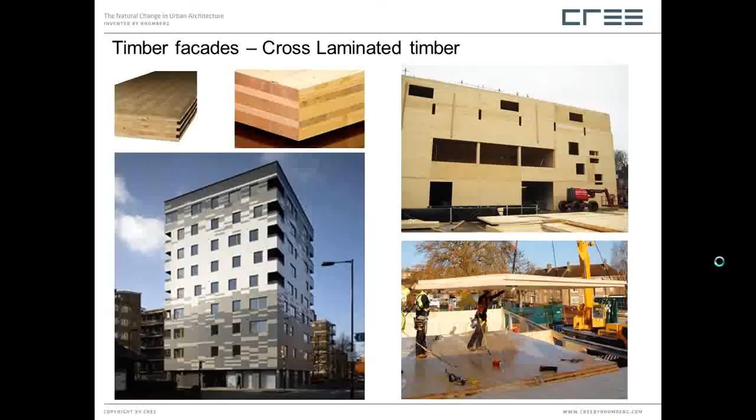This is just some examples of these new cross-laminated timber products I mentioned before. The tallest building to date, or up to about a year ago, was a 9-story wood residential building in London made out of cross-laminated timber. And just recently this year, a 10-story building was built in Melbourne, Australia. So new wood products and new wood systems are being introduced across the world.

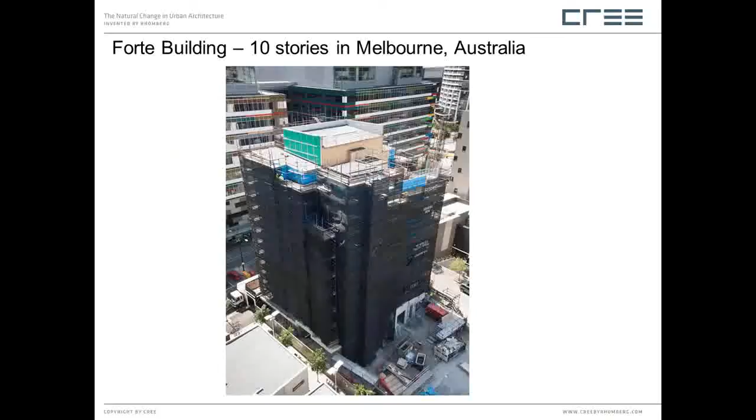Basically, there's a race to go as high as possible. Cree took part in a competition in British Columbia, and we ended up placing second. Michael Green won this competition with his own innovative wood system. Basically it was a project to introduce new ways, designs, and technologies for working with wood. Within a few months, we worked with a Canadian team of architects, a developer, a general contractor, code consultants, and fire consultants. Together we came up with using a Cree system and designed the building.

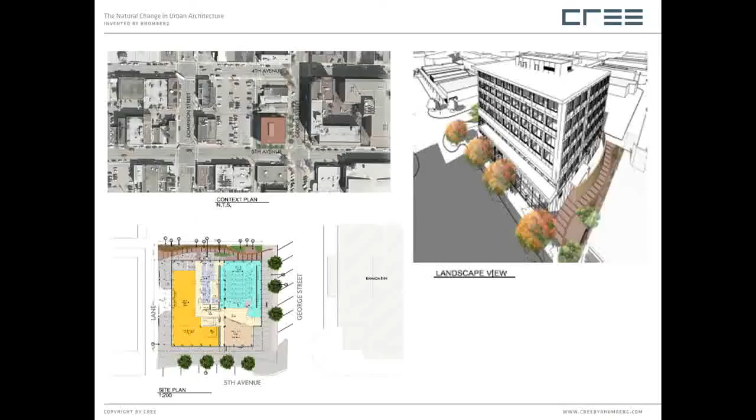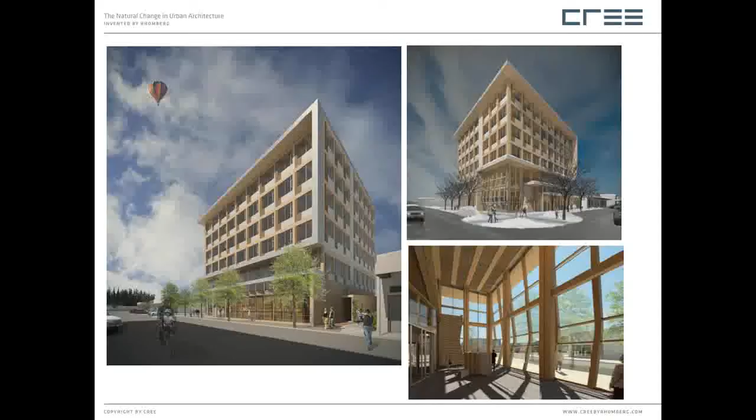Again, it looks completely different than any of the other buildings, but when you look inside, you can see it's the same idea—a glulam post and slab system. So we do have a system that is flexible in terms of design. You can build any building with it, but one thing you can be sure of is you'll get a building that is resource efficient, energy efficient, and will perform as promised, because we have a system approach that we can keep repeating and improving on. Our goal is to make buildings perform better.